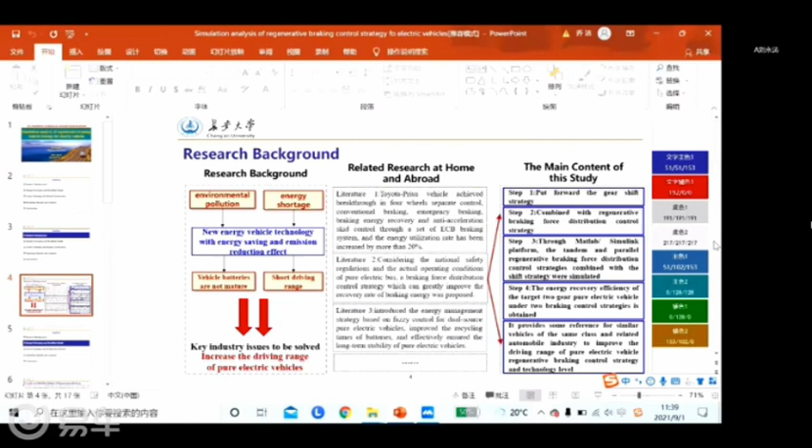The second part is a detailed description of the relevant principles and the revised model. So what is regenerative braking? Regeneration is to achieve the regeneration of braking energy. Braking is to generate the motor braking torque in the process of power generation through the transmission system to the driving wheel braking effect. So the regenerative braking is a technology that can realize the regeneration of braking energy, and the motor braking torque generated in the power generation process can produce braking effect on the driving wheel through the transmission system.

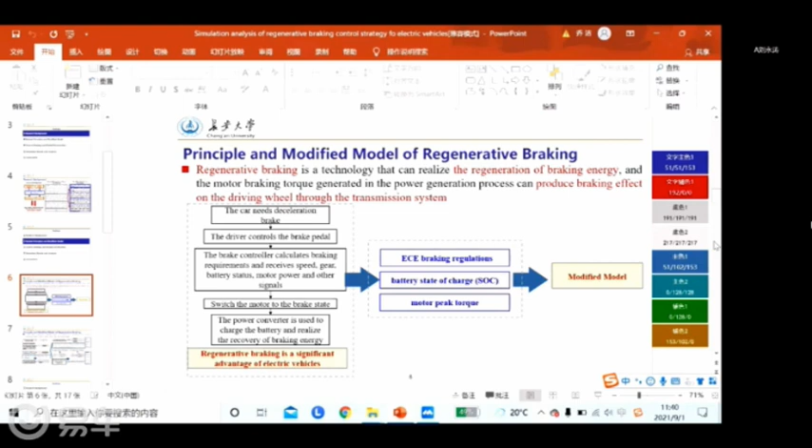Obviously, regenerative braking is a significant advantage of electric vehicles. In this study, regenerative braking torque was corrected by taking into account ECE braking regulations, battery state of charge, and motor peak torque. A detailed description of the modified model is as follows.

In this study, the range of full braking force distribution coefficient of mini electric vehicle is from 0.72 to 0.86. When beta takes the maximum value of 0.86, the max regenerative braking force of the regenerative braking system of the front drive vehicle can be represented, and the max regenerative braking torque of the motor under the restrictions of ECE regulations can be obtained. Combined with the theoretical knowledge of the motor and the known parameters of this model, the max torque of the motor can be obtained.

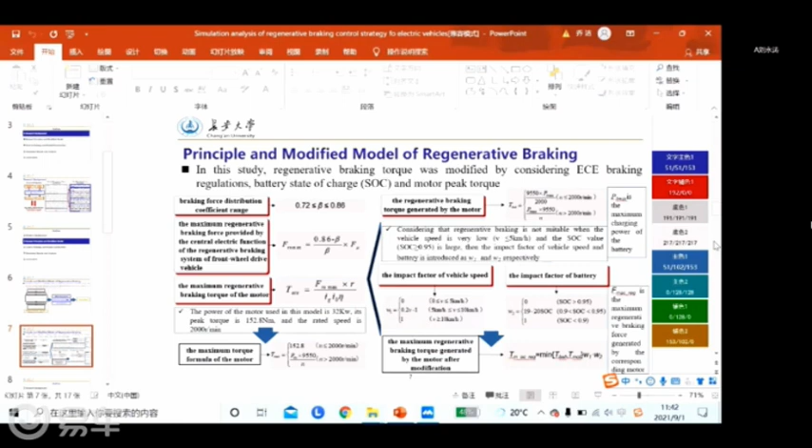Considering the charging characteristics of lithium-ion battery, the regenerative braking torque generated by the actual motor was obtained. Then the speed impact factor and the battery impact factor were introduced to get the corrected max regenerative braking torque generated by the actual motor.

The following part is the control strategy and the model construction of this study. Firstly, the right part is the parameters of the research selected in this study, and the left part is the vehicle model built through MATLAB and Simulink.

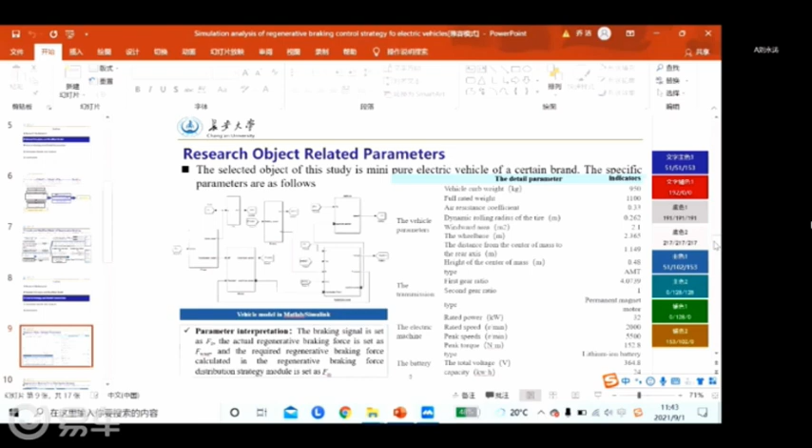Then the serial and parallel regenerative braking force distribution control strategies in this study are described. The front axle mechanical braking force, rear axle mechanical braking force, and the regenerative braking force on the different braking intensity levels of the two strategies are listed respectively.

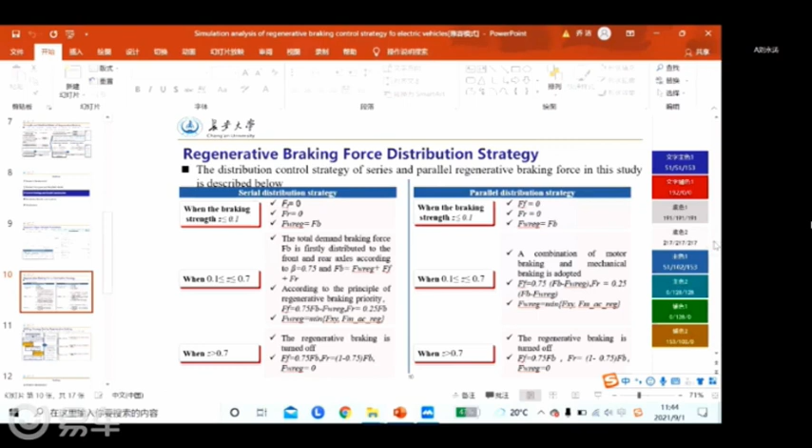The serial braking force distribution strategy firstly distributes the total demand braking force to the front and the rear axles according to beta is equal to 0.75. The parallel braking force distribution strategy adopts the combination of motor braking and mechanical braking. So the front axle mechanical braking force, rear axle mechanical braking force, and regenerative braking force are different.

The safety strategies in this study are described as follows. When the vehicle braking speed is greater than 7.7 meters per second, the second gear is selected as the braking gear. The two theoretical regenerative braking forces are compared to determine the max braking force and mini braking force, as well as the corresponding gear Kmax and the transmission ratio Imax under the max braking force.

When the regenerative braking force required by the calculation output in the strategy model is less than the mini braking force, the actual regenerative braking force provided by the model is the regenerative braking force required by the calculated output in the strategy model, and the gear is unchanged.

When the regenerative braking force required by the calculation output in the strategy model is less than the max braking force, the actual regenerative braking force provided by the model is the regenerative braking force required by the calculation output in the model, and the gear is switched to Kmax.

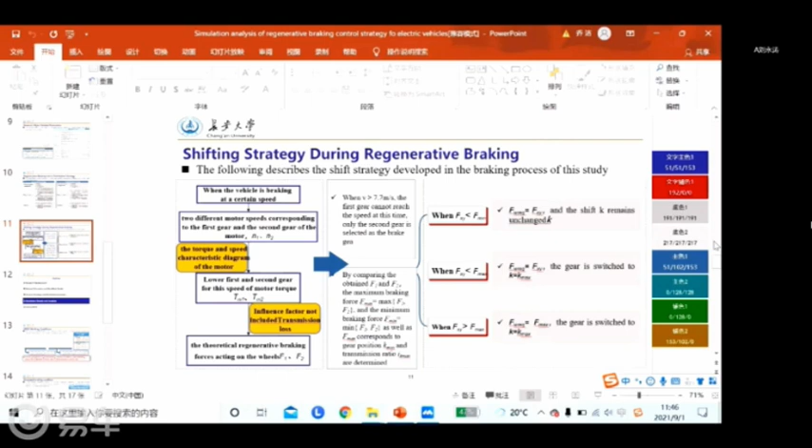So when the regenerative braking force required by the calculated output in the strategy model is greater than the max braking force, the actual regenerative braking force provided by the model is the max braking force, and the gear is switched to Kmax.

The fourth part is the simulation results and analysis. The American Standard Urban Cycle Condition, UDDS, and the simulated braking condition are selected in this study to carry out the simulation respectively. For strategy 1, the serial regenerative braking force distribution control strategy combined with regenerative braking shift strategy. For strategy 2, the parallel regenerative braking strategy combined with the regenerative braking shift strategy.

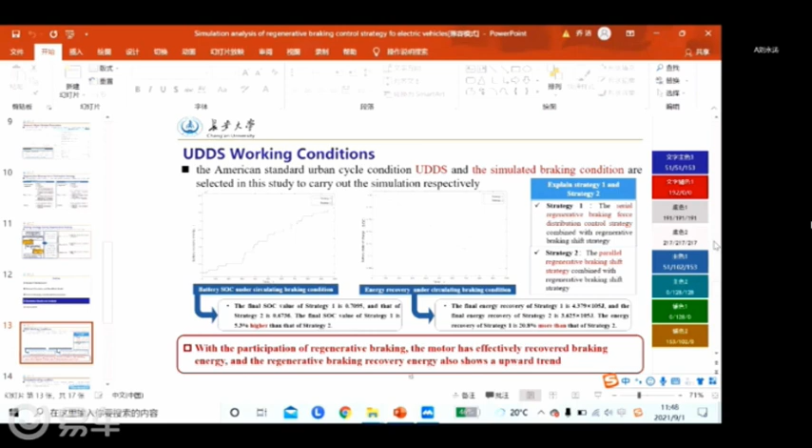After the simulation, the final SOC value of strategy 1 is 0.7095, and that of strategy 2 is 0.6736. The final SOC value of strategy 1 is 5.3% higher than that of strategy 2. So for the energy recovery, the energy recovery of strategy 1 is 20.8% more than that of strategy 2. With the participation of regenerative braking, the motor has effectively recovered the braking energy, and the regenerative braking recovery energy also shows an upward trend.

For the simulated braking condition, as the braking strength is below 0.15 in the circulating condition, a middle-high strength braking condition through the MATLAB and Simulink platform is simulated and analyzed. After the simulation, the battery SOC value of strategy 1 is 0.7928. The battery SOC value of strategy 2 is 0.7922. Also, the energy recovery amount of strategy 1 is about 56% more than that of strategy 2. The pure electric vehicle with serial regenerative braking control strategy has a higher battery SOC and recycles more braking energy.

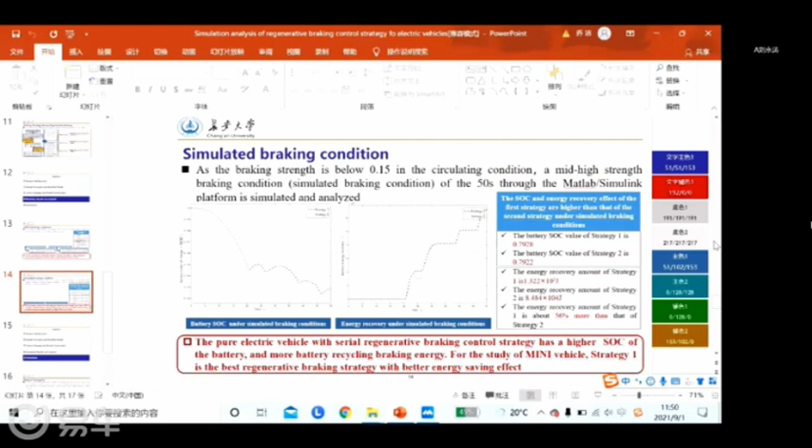The last part is the conclusions. For the 2-gear mini pure electric vehicle in this study, the energy recovery effect of the serial regenerative braking control strategy combined with the shifting strategy is obviously better than that of the parallel regenerative braking control strategy under the same working conditions. The serial regenerative braking control strategy combined with the shifting selection strategy is a feasible and effective method to improve the battery energy recovery of this model and extend the driving range of the electric vehicle. This study has good practical significance to improve the energy saving effect of similar electric vehicles.